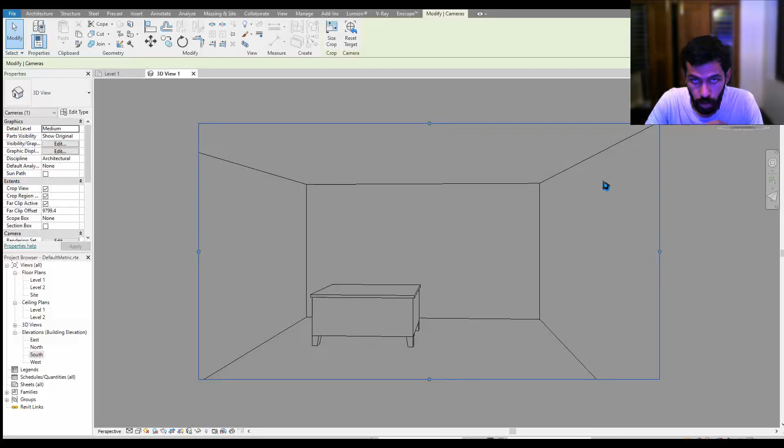So, alright, in this video, let's try to create the most realistic light material in Revit architecture.

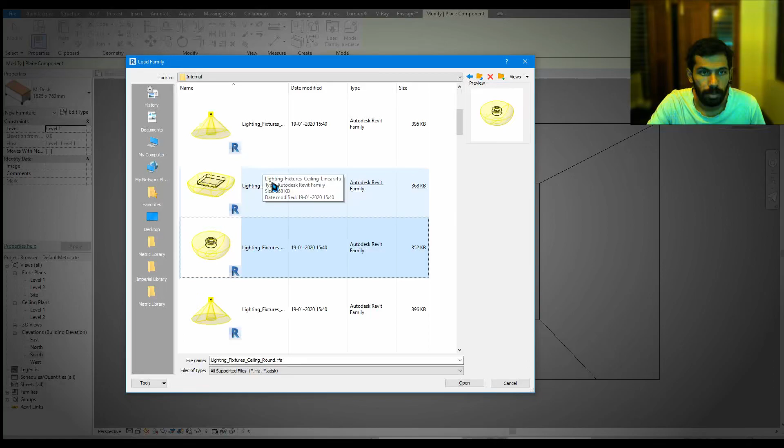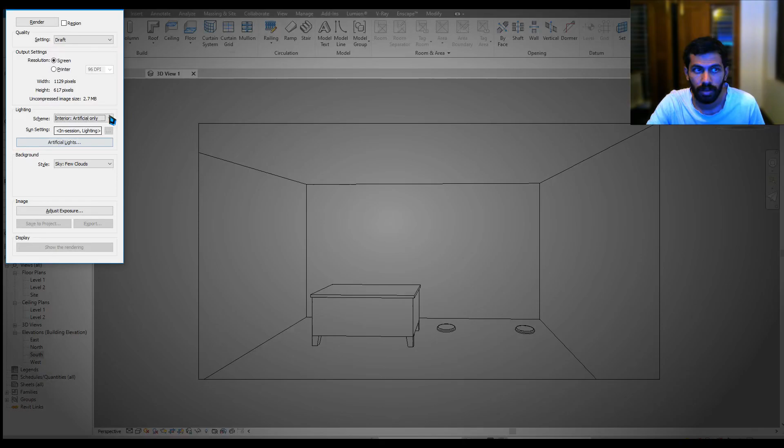First, let's place an artificial light right in here. I'm gonna get into load family, and pick up a lighting folder. I'm gonna go for architecture, maybe an internal light, probably a floor light that's right here. I'm gonna fix two lights here, and if I try to render the scene, I'll pick up interior artificial and hit render. This is the first scene where you're having very low brightness.

Let's change brightness and let's change material. If you observe the light, you can see there is a white cutout over there. But in the actual case, if you observe any object or any sort of light, there will be an internal light emitting material, and that light will hit a surface, and that surface will absorb some of the energy from the light and re-emit that energy, which is simply called translucency. So this is the case right here. We're having an LED strip, and that LED strip is emitting the light, and the diffuse or the outer material is able to capture the light and re-emit itself. That is how the light material actually works.

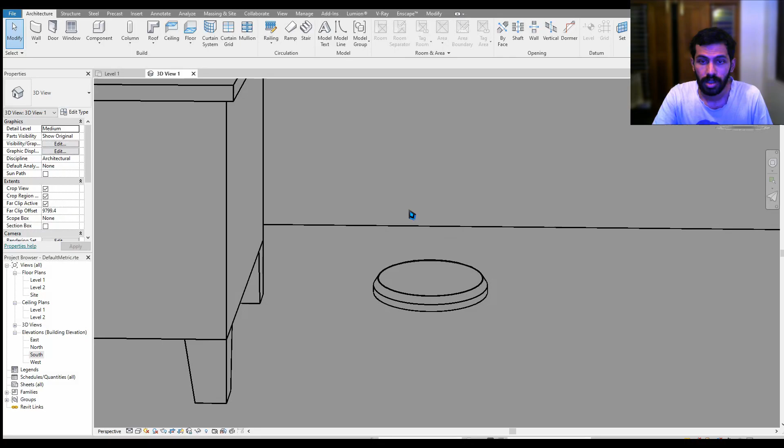I can show you a different case, that's the same light, and you can say there's an internal light there, and light is emitting, and that light is being absorbed by the outer diffuse, and the diffuse will act as a light emitting material. So that's the general case of the light emitting material. But in this case, you can see there is no actual light emitting material. No translucency is being provided here. If you closely observe it, the screen is filled with a white object, which is not at all a translucent object. So let's try to change materials.

I'm gonna select the floor. Maybe I'd like to go for some sort of white toned material. I'm going for porcelain as the floor material, and for wall material, I like to go for some sort of clad white material. That's enough, so the materials look okay. Now for ceiling, maybe some sort of wooden material. Alright, so all those three materials are totally okay.

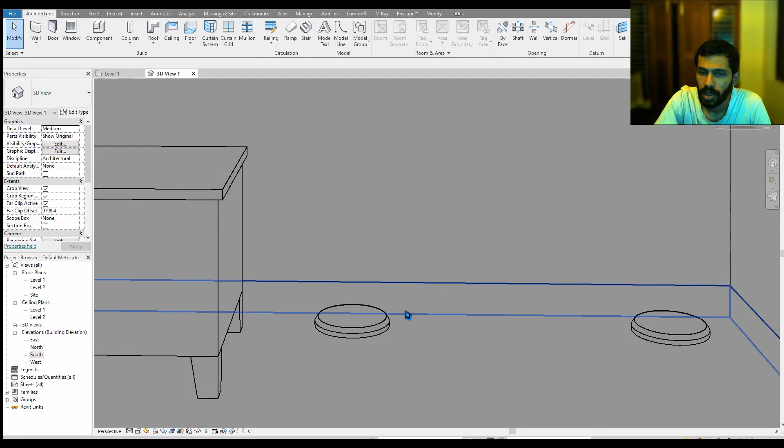Now let me try to change the actual light material. If you try to render the scene, you can see that much more emissivity has been increased. Light is more emissive, and let me change some of the properties here. That looks okay, but the problem doesn't solve right in here. So now let's try to change this asset.

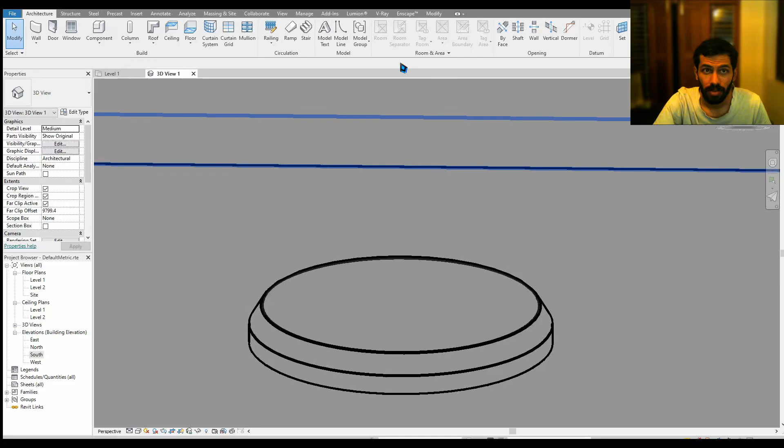For changing the light emitting material, I'd like to create one by getting into manage materials. Right now you can create a new material, which should be renamed as light emitting material, whatever be that. In the appearance, there's only a single option you'd like to change, which is translucency. I like to increase the translucency to 100, that's enough, that's the only thing you'd like to do. For shade, I like to change this into a sort of warm tone. There's nothing more much I'd like to change, and transparency maybe 20 to 25. More transparency provides more chance for the light emitting material to get visible, so I don't want it 100% transparent.

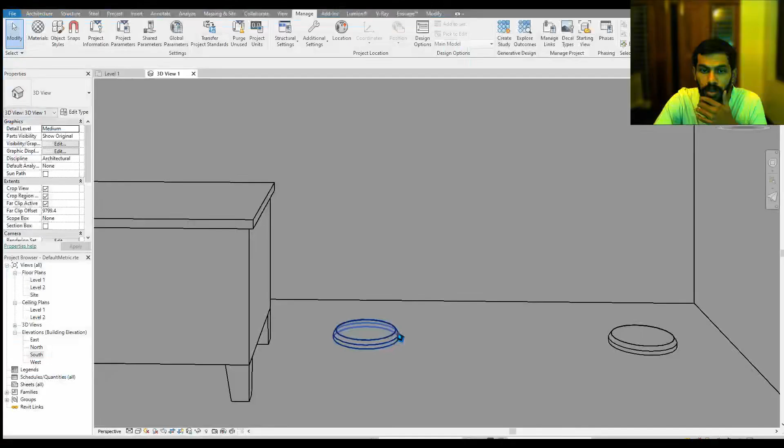So now let's select the light emitting light, and if I have a diffuser material here, I like to change it into light emitting material. That's it. Now if you try to render the scene, this is the situation right here. You can see realism has increased a bit more, but the other case is totally chaotic. So we can change some of the settings right in here.

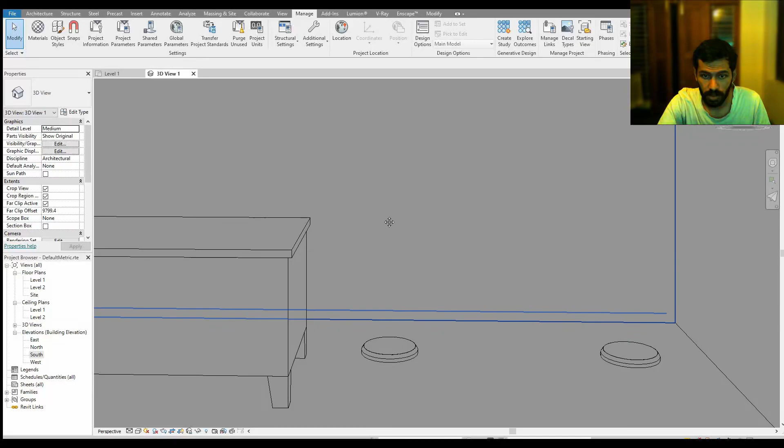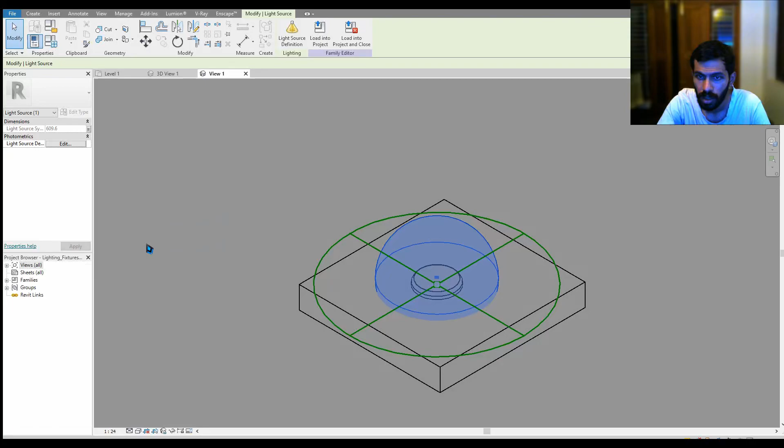I like to get into the actual light and increase the brightness. This is an IES light. You're gonna get into edit family, and I like to get into the light source definition. I like to change this into a uniform light. Alright, let me increase the brightness a little bit more. Okay, that's it, there's nothing much more to change in the light settings.

Now let's get into the custom rendering settings, and get into edit. I like to precisely control the shadows with maybe level 8 or 9, whatever be that, and I hit render.

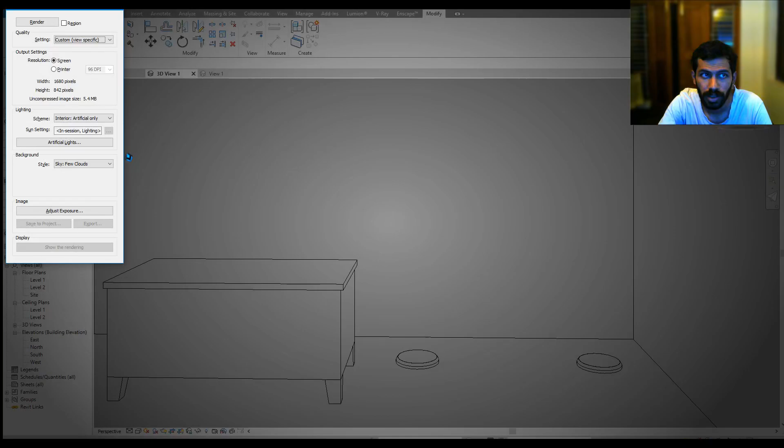So that's the modified or updated material, and that looks totally okay compared with the previous white only material. There's a sort of radial gradient, you can say, and if I try to increase the brightness, you can see the center spot is brighter compared to the overall white material in the last set. Now the rendering is not 100%, I stopped rendering in between, which I always do. Alright, okay, so that's it on this video, and thanks for watching.